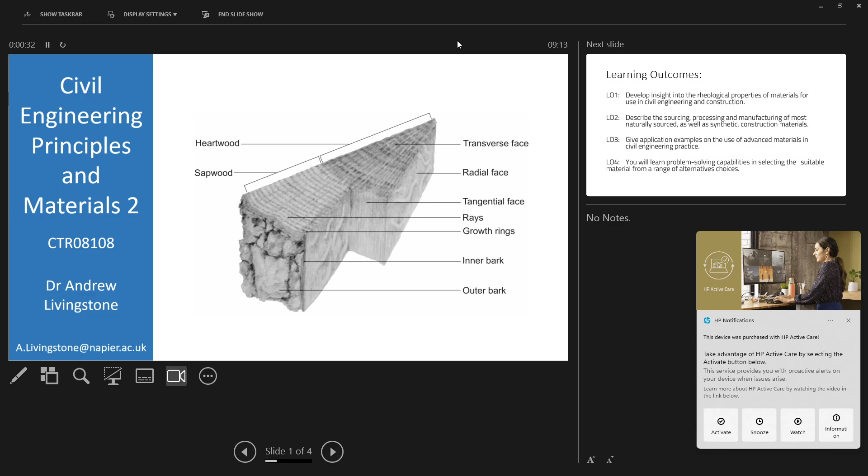Doesn't matter. Right, so name of the module, materials part 2. You probably can't see. Move this out of the way. And right, the learning outcomes, all this will be online for you. I'm not going to read word for word, it's a bit boring. However, this is what I want to talk about. So this is our program for the term. You're going to have to do some exercises, courseworks. So you've got, if I go forward one page first of all, I'll explain.

Hi Taylor. We've got formative assessments and we've got summative assessments. Your summative assessments are lined up like this. This is where the choice comes in. It used to be when I first took this module on, I would do this as one coursework, right? And people would genuinely fail it. I don't know why they could, but they actually would fail it. The reason being, they would put it off and put it off. We'd do all the lab test work, but they put it off to the last minute, then submit it. Then you've got 2 other modules that you're also doing, and then it would be just too much.

So a couple of years back, well, more than that now, I've separated this up into 3 bite-sized chunks. And what we decided was, if you do the first one, all 3 are pretty much exactly the same. I'll give you an example of the 3. As long as you hide your phones and don't record. I'll show you how some of you got 100% on all 3 of them. I'll show you how they look. Right. But if you do the first one, I'll give you written feedback on how to improve it before you submit the second one. Then you submit the second one, I give you more written feedback before you submit the third one. So you got a chance to improve that mark as you go.

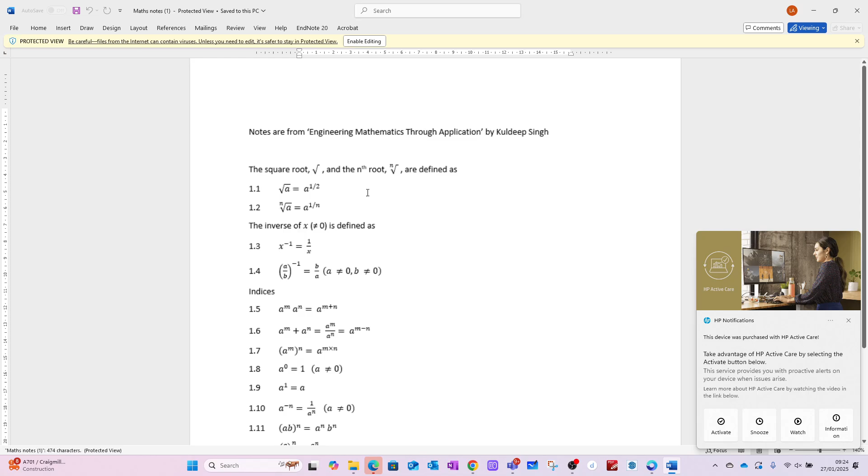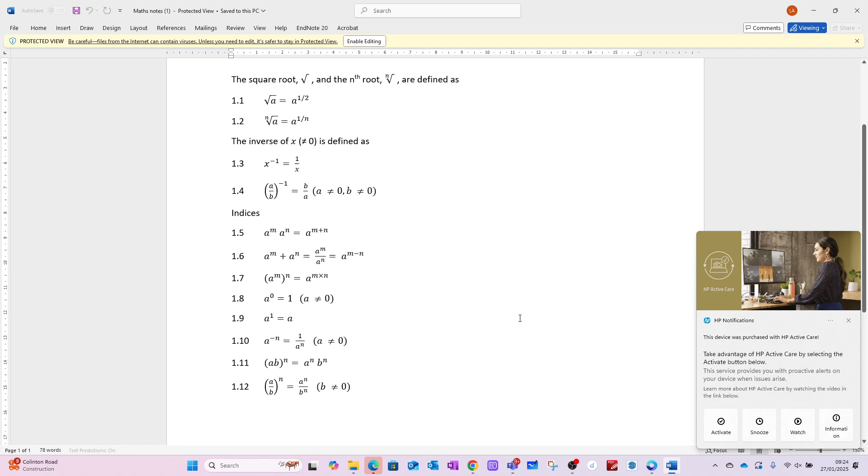There's an obligatory module guide. You read that through at your own leisure. I'll not go through it in here. There's this cheat sheet I was telling you about. It's just ways to manipulate or how to convert things. It's all about just changing a formula to get out what you want out of it. I don't think you need any more than that, to be honest. However, there are worked examples in this book, which I have given you. Let's have a look at that just now.

What I'd recommend you do is you download this book and save it somewhere, keep it. It's actually a handy thing to have. I will, however, put this book online as well, as long as you don't grass me up. I'm not too sure I'm allowed to do that, to be honest. But I'll load it up and I'll take it off before the end of term at some point. Okay? Of course.

These sorts of equations, though, for beam analysis, you'll need to remember the main ones. The main ones you'll want to remember off by heart will be simply supported with the UDL and simply supported with a point load in the middle. The ones after that, if you can remember the Macaulay method that you got taught last term, then you'll be fine.

Right. Two other documents I've put in here: BS EN 408 and BS EN 338. We're going to cover them later on. We won't touch on those today. Right. So what we'll do is we'll just go straight into today's class.

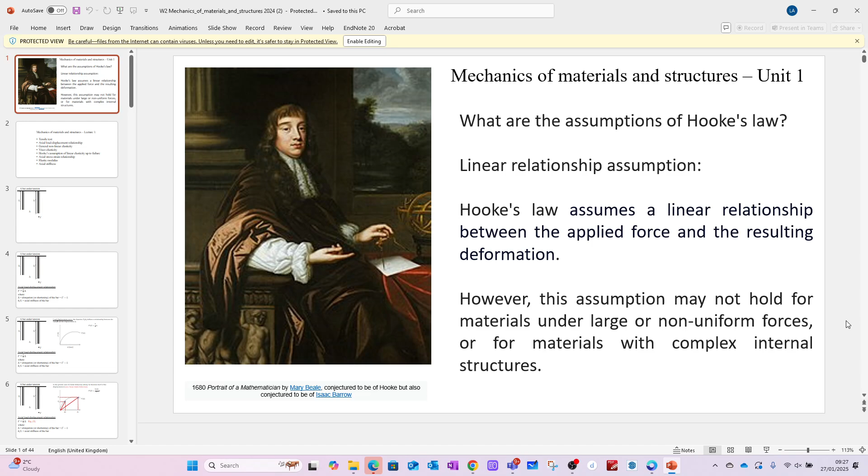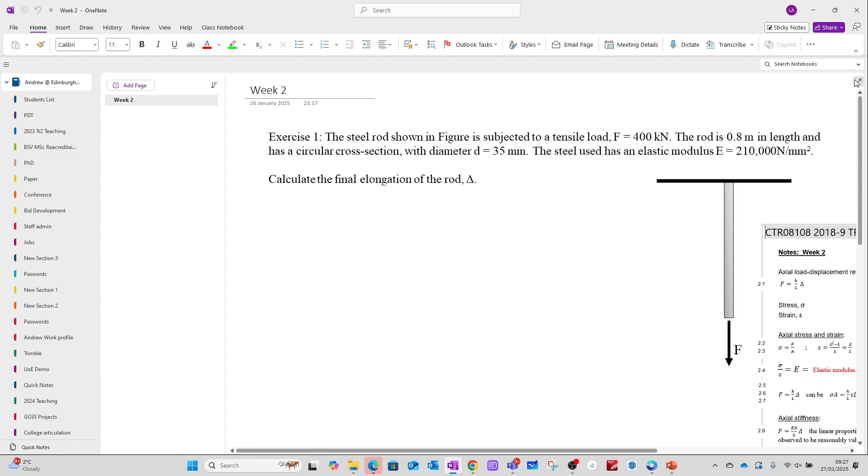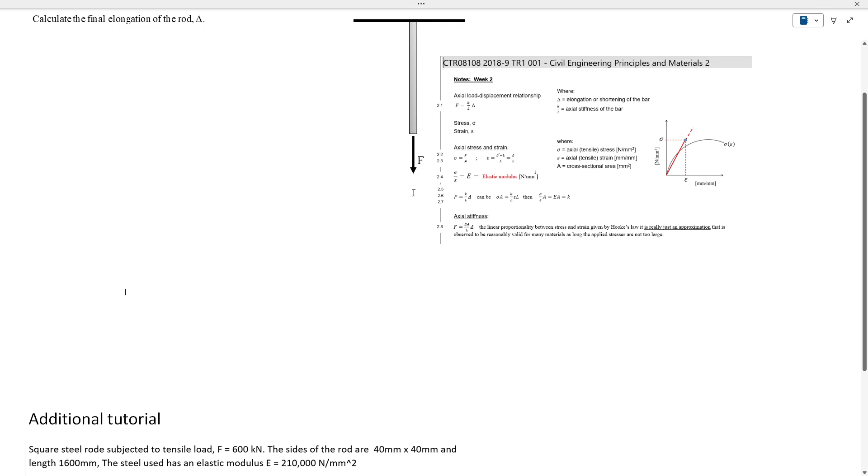Right, on that note, I'm just buying some time now for Terra to come back. I think that's her name.

This is my equivalent of the notes from today's lecture. Now you'll make your own version of this. So I went through this material and I've made my own notes from it, and that's what I would call my cheat sheet. Probably won't give you this in the class test. You'll have to memorise some of it. So I'm going to show you my tricks. I do things that help me. I'm heavily dyslexic. I find it difficult to remember things like this. So I do things that help me. Might not help you, but it might.

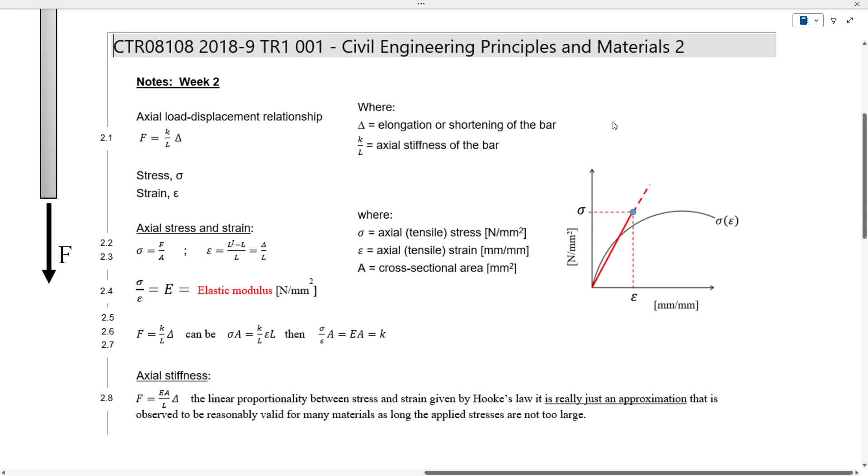Are we writing this down now? No, you're not. No, that'd be too boring. You want to write stuff down once you actually know what you're talking about. Right, I think we might just have to start, I'm afraid.

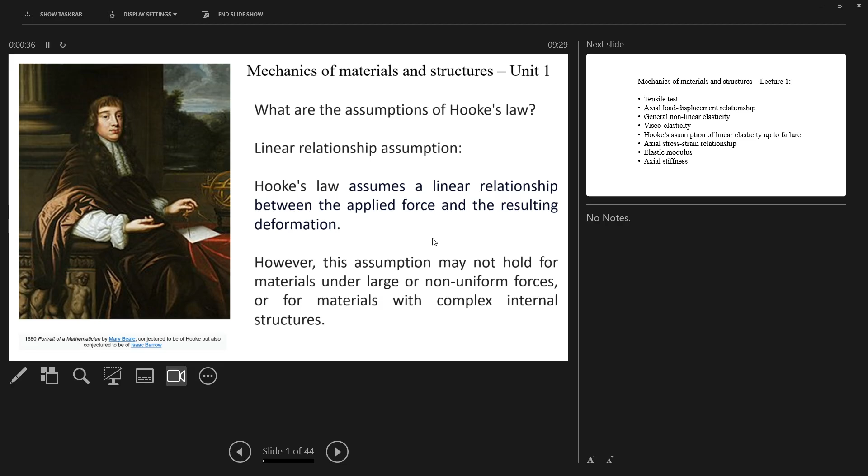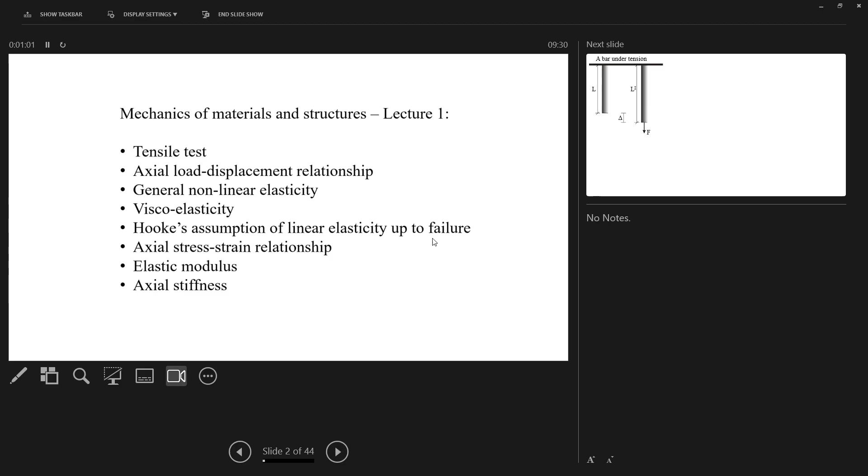We'll just crack on. Right, so this is the learning outcomes from today. We will talk about visco-elasticity later on, because that's possibly an interesting one, even though it is covered in one of the other modules. Right, so that's a bit more of a recap from what Juan taught you last year, yeah? You've seen this before.

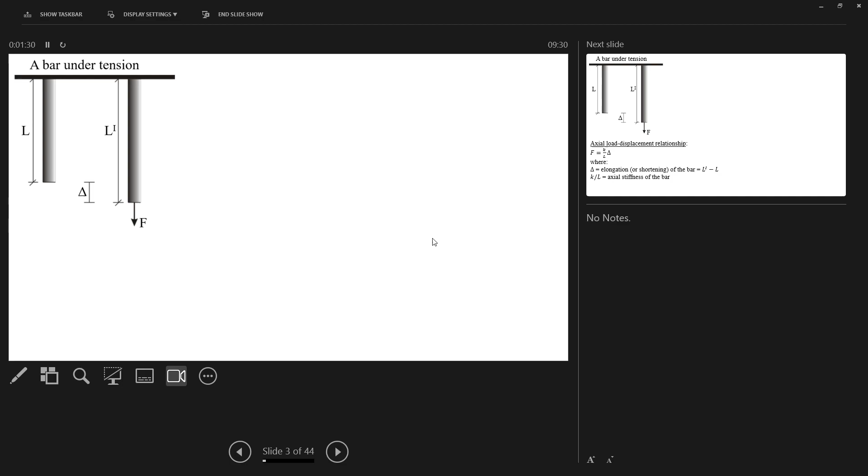So if I've got a rod and hang a weight off of it, it should elongate. I'm going to call that elongation delta. And so there's your first equation here: force equals K divided by L times delta, where delta is the elongation or the shortening of the bar. It could be a compression force or a tensile force. So you can write this down, and then K over L is the axial stiffness of the bar, how stiff that bar is. This is actually really quite important. I actually want to write a paper on this stiffness thing for a much more complex scenario at the moment.

Right. So if I'm going to apply a force onto that, and I've got my elongation along the bottom and my force up the side, I'm going to get a graph somewhat like that. Okay? Like a real live, like a real, what would we call it? To be fair, that's a bit more of an exaggeration, but it wouldn't be perfectly straight lines anywhere.

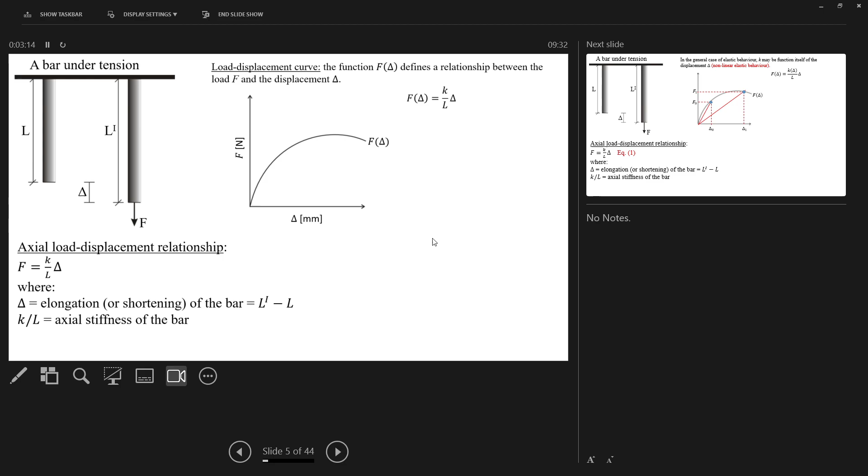However, we're going to make some assumptions. Now, I can show you real data another time, perhaps, where, in actual fact, this is a bit of an exaggeration. There would be areas that would be more straight. However, Hooke's law makes some assumptions, and they are just that. They're assumptions.

If I apply a load, so F0, up to here, and I then take the load off, I would expect my material to go back to its original shape. Okay? Well, first of all, if I find that.

However, on this graph, F1 and delta 1, looking at the shape of that graph, you'll not have covered this yet, but I would consider it very unlikely, if I take the load off, that it would go back to its original shape. Why would that be? Well, let's have a look at this first of all.

Force over delta, K is stiffness divided by L, whatever, right? From equation 1, we've got these here. You've got two lines. Let's have a look at what KL is then. I can shadow on that, yeah, I can. Right. For just now, assume that the load will go back to its original shape. But look at the angle of the line.

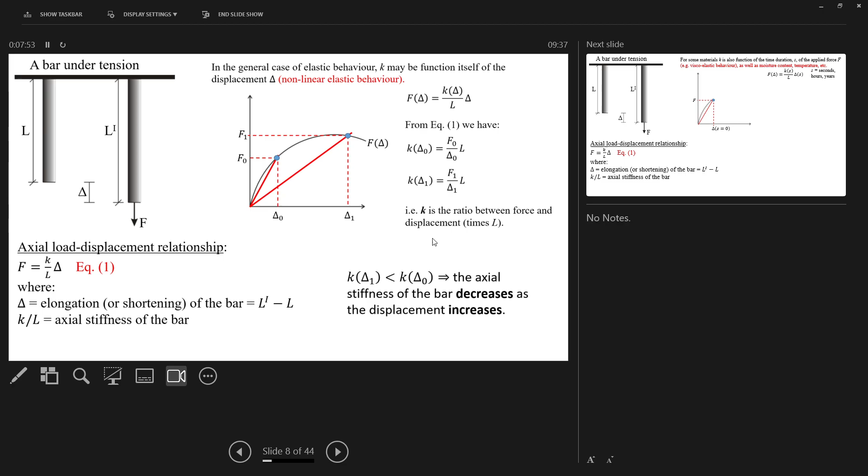So S is now a measure of time, where before, on the previous slide, we were talking about the magnitude of the force. Now we're not. We're keeping the force the same, but all we're now going to do is elongate it. Now it's got it in seconds, but it could be seconds, minutes, hours, days, weeks, years. Over a period of time, we'll have fatigue on that material as well. There'll be a displacement.

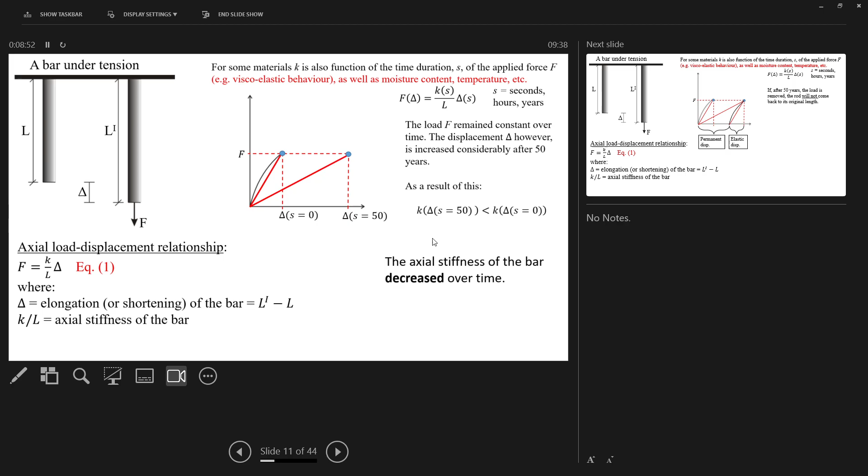So that's something that would be thought about for various structures, depending upon what it is we're trying to design. And we do indeed use that. We call that creep. Some materials we don't even bother about it, but other materials we actually do have to consider this factor. We call that creep. Or for concrete, we talk about fatigue. Metal as well. Right. Now we're going to get into the heart of Hooke's law. Hooke's law starts talking about this linear elastic and then non-linear plastic behavior.

What you'll find is if you then take the load off, it's never going to come back to its original shape. It won't do that. However, it will come back to a point. There will still be deformation from the original. And that will be permanent displacement.

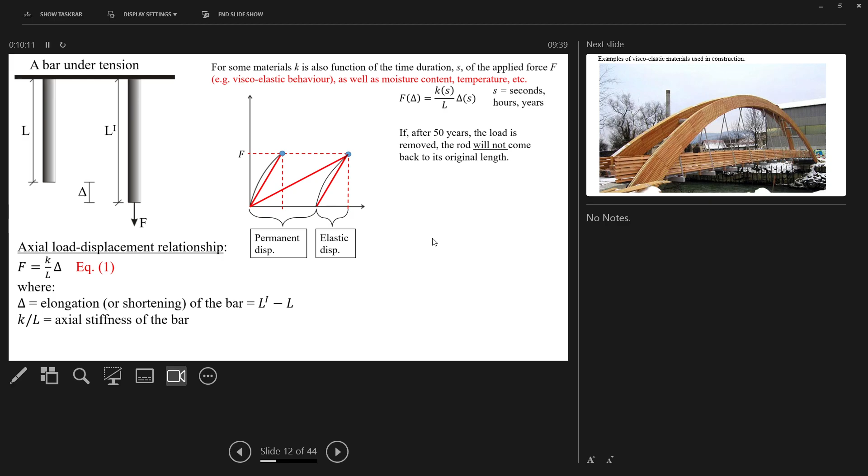For this part, for the load going back on again, and with the permanent displacement. That's the sort of thing we're kind of getting ahead of ourselves now a little bit. But again, on this sort of bridge here, we would definitely find that sort of scenario happening.

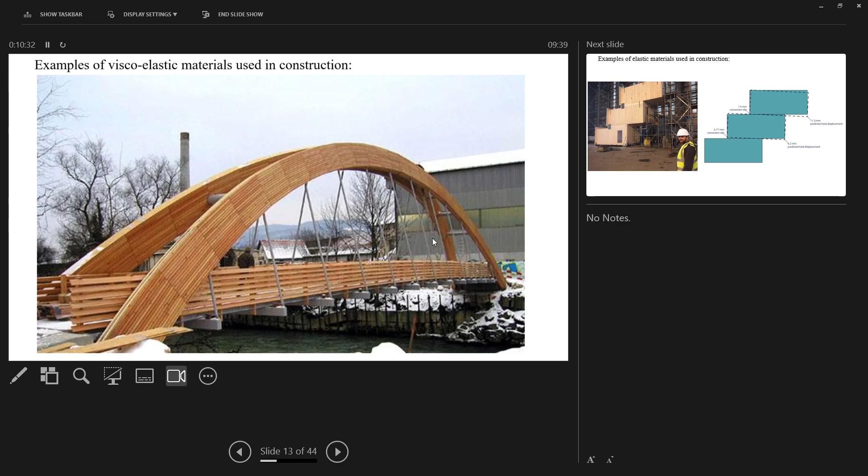You all remember in first year when we built those cardboard Dyson modules? Remember those Dyson module things? I had to account for that in this. Actually, there's a slide you've seen before. We had predicted total displacement.

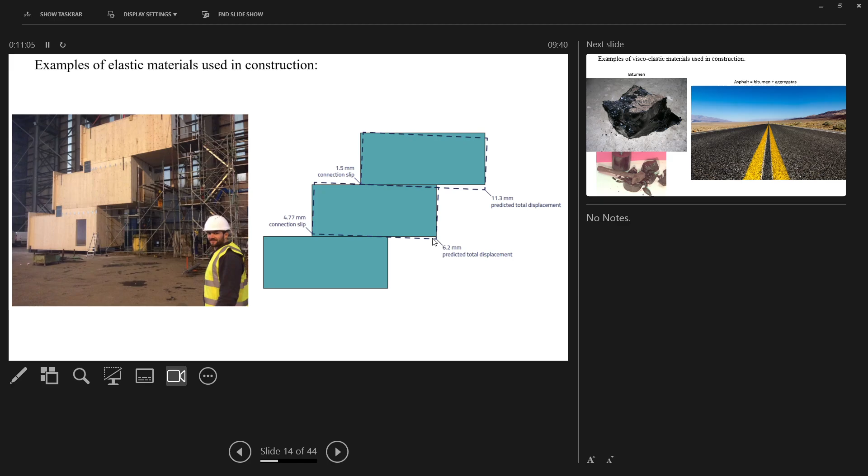I worked all this out with a bet of about 7 engineers. I worked out all the maths. They waited until I put my first bet in and they all went underneath me. I came last. We actually worked out who would be nearest it. So I worked it all out. I divided my answer by 2 and everybody then went underneath what I predicted. I lost a bar of chocolate. I was quite annoyed. Right.

Okay, I've left this in. Well, that's quite good. I was asked to take this out because you've been taught about this elsewhere. Has Juan been teaching you about viscosity in tarmac? No, okay then, we'll talk about it now for 2 minutes.

There's a lovely experiment where they took some bitumen and they put it in a glass and they've left it for, we'll find out in the next slide, from 1927, the experiment started. Bitumen is a liquid and it moves, but it moves incredibly slowly.

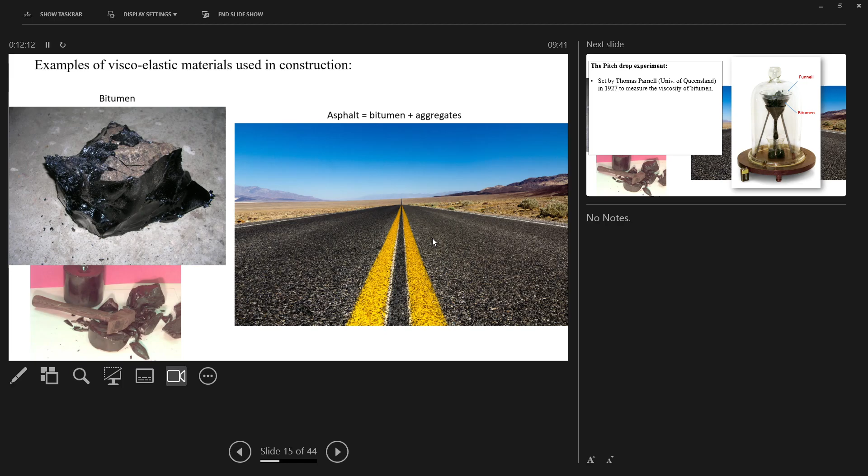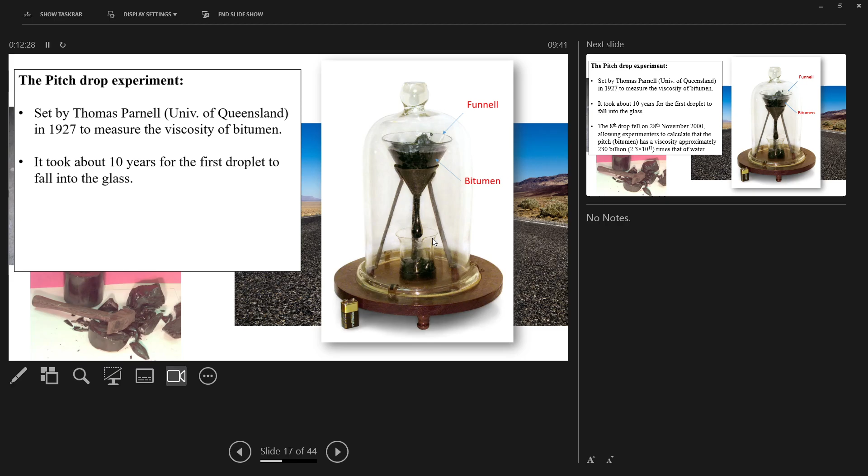There was a slide in here when I took this module over, which I had to remove, of big glass frontage. People up until quite recently used to believe that glass behaved also like bitumen. It was actually moving. I'll show my point first of all. There's the experiment here. I believe it's still running to this day, where the bitumen is sitting in the funnel like that from 1927, and there's a number of drops fallen, and I think it took 10 years for the first drop to fall into the glass, and yeah, so it's still going.

They used to claim that glass was the same, and nobody ever questioned it. And you were probably even taught this yourself at school, that glass is flowing. I was taught it at school. Absolute nonsense. Someone did some scientific research on it, i.e. they went round all the old buildings where the glass was thicker at one edge rather than the other, like 200-year-old buildings. And what they found was, it's nonsense.

When they used to make glass back in the day, they would blow a bubble of glass. They would then cut that off, fold it out, and make panels out of it. And in the old pubs, the bottom pane was that bit at the bottom of the bubble. It was a bit weird. They used that as a decorative panel and small panel for old pubs. Am I showing my age now, yeah?

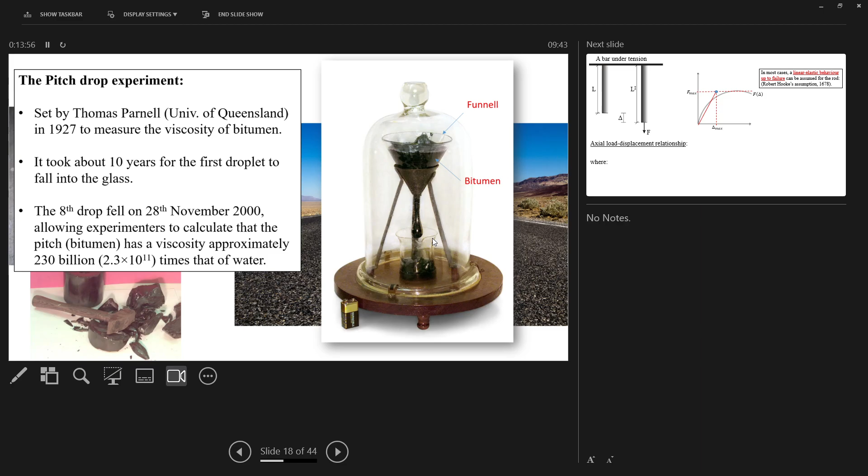There are some old buildings that have small panels in and every so often there's a panel with a little nodule in the middle. That would be from the blown glass, the bottom part of the bubble. But the rest of the panes, it would depend on however it was put in. So you'd find thicker glass at the top or the side, it wasn't all at the bottom. People actually thought that glass was behaving like water. It wasn't. Anyway, we'll move on. I'll get back into steel or other materials now.

So again, this is more of a recap of what you've done with Juan. We've done all this with Juan so far, yeah? This sort of thing. Good, right. Now let's have a look at this linear elastic relationship, i.e. Hooke's law. Because that graph is the same graph we had before, even though I do think that's a bit exaggerated. In the real graph, you will see a bit more linear behaviour. But for simplicity, we're showing it like this.

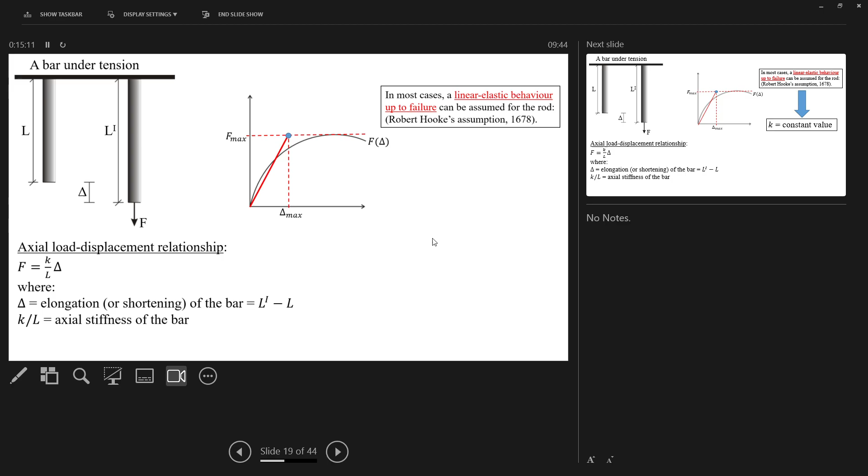Because Hooke's assumption, it's not a law, it's actually an assumption, is actually a fairly good assumption. And engineers, we all use it to this day. So the equation you had before, force equals K divided by L, which is essentially stiffness, that angle, times delta, the elongation. What we find is K is a constant value.

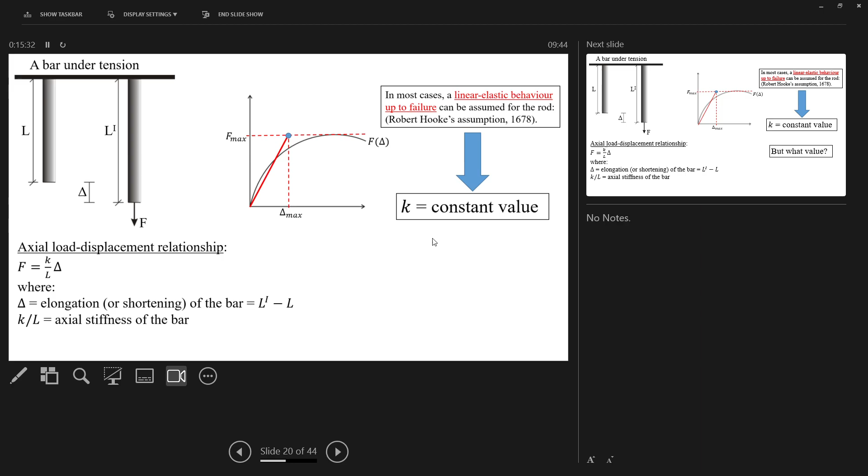I haven't even told you what K is yet. All I've told you is that K divided by L is stiffness. That's all I've told you so far. But we know that K from this will be a constant value. But what value? Right. Stress and strain. You've been taught this before at high school, I believe. Right. Stress and strain. What is stress?

Stress is a force over an area. So if I have that surface area over that table, the stress underneath is force over area. Strain. What's strain?

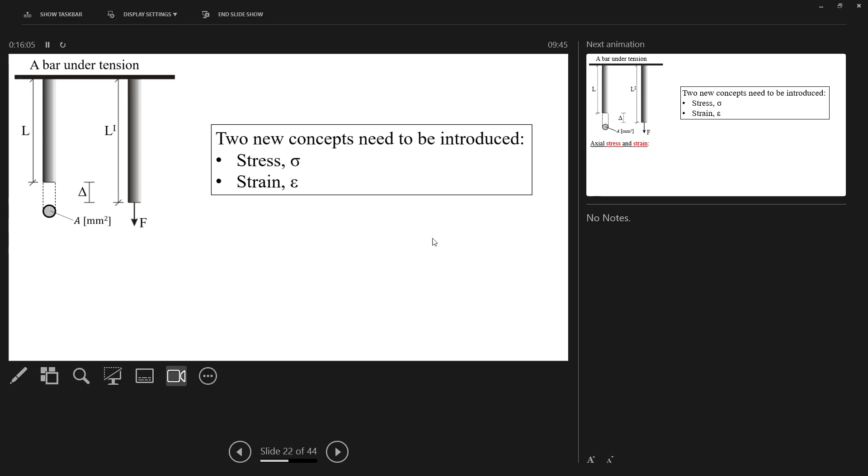Sorry? Kind of, yeah. It's this is a good thing then, right?

So for stress, force over an area, if we write this down in units, okay? So the axial, tensile, or compressive, yeah, that's fine. Right, I've been stupid. Right. Tensile or compressive can be newtons, force, divided by an area, a millimeter squared. So that unit is important to know. You want to know what units things are in.

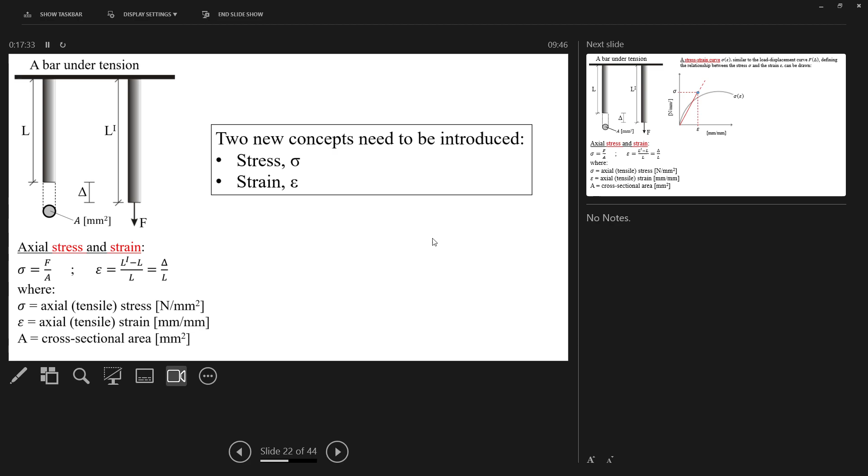The strain is essentially millimeters divided by millimeters. Let's have a look. We've got the elongation, that distance there, divided by the original L. So it's just millimeters divided by millimeters. Don't be naive and think, oh, that's just unitless and I'll not remember to think about the unit. In this module, I'm going to help you to write down what those units happen to be if it is a ratio. If it's a ratio that you know what the units are. There will be some ratios that we use that you don't know what the units are, and that's fine. But when you do know what the units are, do yourself a favour, jot them down on the paper. Right.

So the stress strain curve has a relationship. And here, so there's your next equation there. E, or the modulus of elasticity, equals stress over strain. And that's quite an important equation to remember. We've got the force displacement relationship, seen that before. Now it can be rewritten in terms of stress and strain. Force equals stress times area, and then delta, or the elongation or shortening, can be rewritten as strain multiplied by the original length.

Okay, does that make sense? If it doesn't make sense, go home tonight, take some paper and sit and just work through it until the penny drops. There will be quite a lot of equation manipulations. And the best thing to do, honestly, cheap white paper, steal some from the photocopier if you need to, and just sit and just go through it. Right.

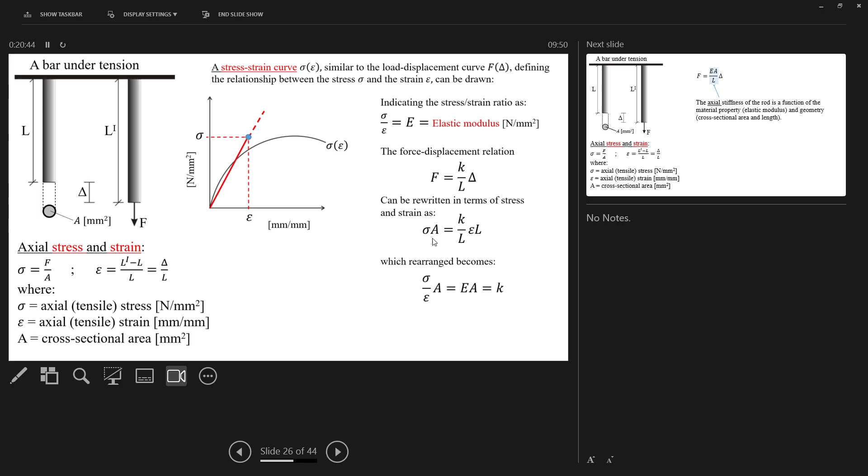Oh, sorry, you write it down? Sorry, I'll keep it up till you write it down. I think what I'll do, I'll actually just put the recording online for everybody. There's maybe a bit much in this. Right, we're all good to go?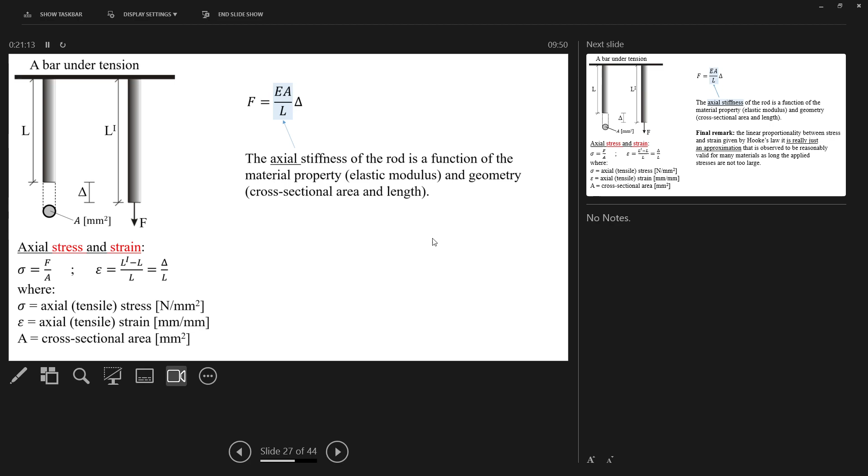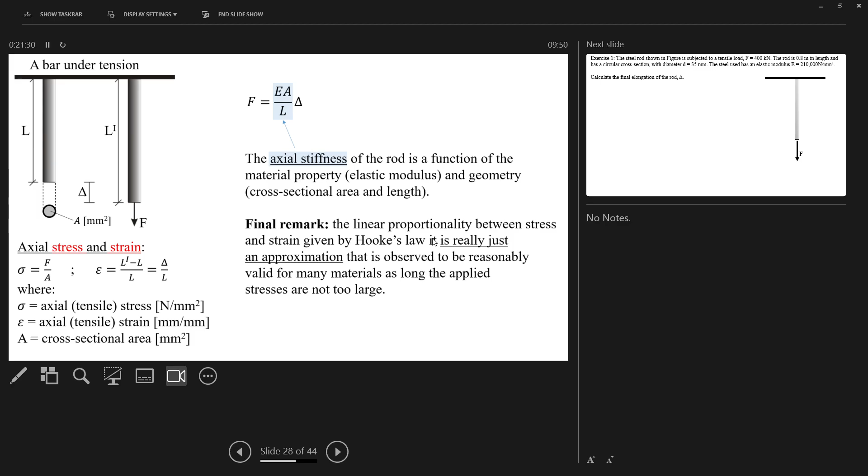Right. Okay then, the axial stiffness. Remember this was what used to be K up there. Same equation, just we've got EA up there now. Of the rod as a function of material. So this is a function of the material properties, the elastic modulus, and the geometry, the cross-sectional area. Final remark. Yeah, so I've already said this multiple times, it's just an approximation. However, we use it to this day, all engineers use these assumptions.

Right, exercise 1. So with what you've already got, what I'm going to do, make some space for myself. What to do is, this is the exercise. Can we calculate the elongation of the rod, delta, with these parameters? You already have the equations that you need. So we've got force as 400 kilonewtons. We've got the rod as 800 millimeters. There's a wee clue there. Has a circular cross section with a diameter of 35 mil.

And it has a modulus of elasticity. We tend to write the MOE down in different ways. I keep calling it MOE. It's written as E, and there's other names for it as well, but it's just modulus of elasticity. We have all the data that we need. We should be able to calculate that. Give it a wee shot, and I'll get myself set up.

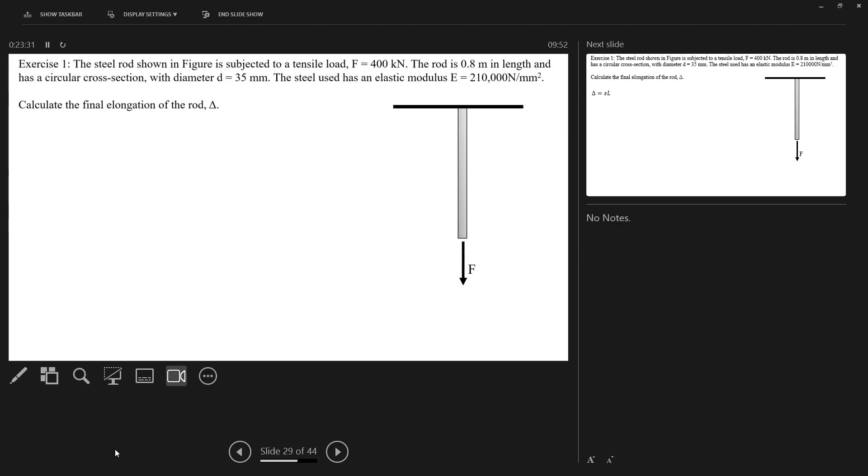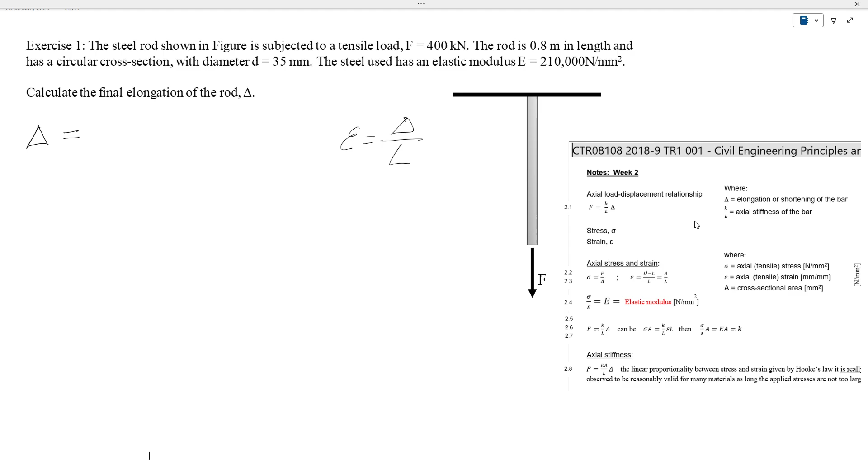There's a valid point. I'm going to rewrite that equation to suit me. Remember, this is what I do. I'm dyslexic. It works for me. It might not work for you. Maybe you don't need this. I tend to do it all the time. What is the equation in 2.3? Yeah. So the equation we've got is strain equals delta over L. I'm going to rewrite that. Anyone seen anyone do this sort of thing before? Yeah. So I'm going to use that. I want this one. I've got these two here. Make sense? Right.

Now, I have L. Actually, what I would normally do is write out, I saw some of you doing it as well, all the variables that you actually know. So we know force, we know length, and this is where one person might have tripped up originally, was the units. So when writing it out, I'm going to go back to the start. I can take my time. I've got lots of time on this. So force equals, pardon me, force equals 400 kilonewtons.

Length equals, at this point, I'm as well putting everything in the correct units rather than waiting to the end. Because for you it was really easy, you knew what the problem was, and you could probably have fixed that without even recalculating it. However, when the equations get a bit more interesting, you definitely won't. It'll be more of a mind mess up. So get in the habit of doing this. Write all the variables out again. L is 800 mil.

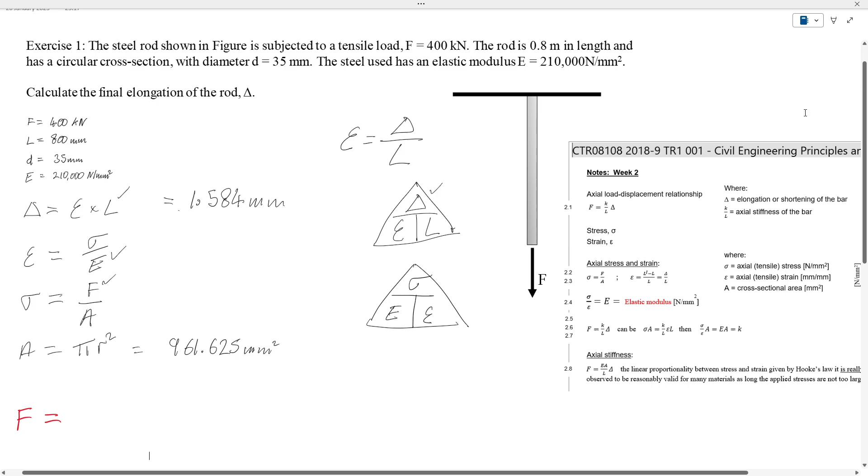They just looked at the bottom here and went, oh, that's handy. Just look at that bottom one. So they just wrote it out. They wrote force equals, sorry, you can't see that. Why can't you see that? What's happened? There we are. Right. Force equals E-A over L times delta.

Without any hassle at all, we just rearranged it and just got delta equals F-L over E-A. Right. Obviously, we can calculate A, and you've got everything else. You've got force, you've got length, and you've got E. You've now got A. Then you get the answer there, and it gives you the exact same answer. Make sense? Much faster than how we done it the first time. Much faster.

Right. These are obviously switched on. Most folk don't see that straight away when I do this. However, what I'm going to say is in this module and in real life, to be honest, real life problem solving, this is what engineers are. That's what we are. There's always another way to look at it and think, can I calculate it a different way? Are there equations or is there another toolkit? Can I use calculus? Can I use complex numbers? There's another way to calculate what I want.

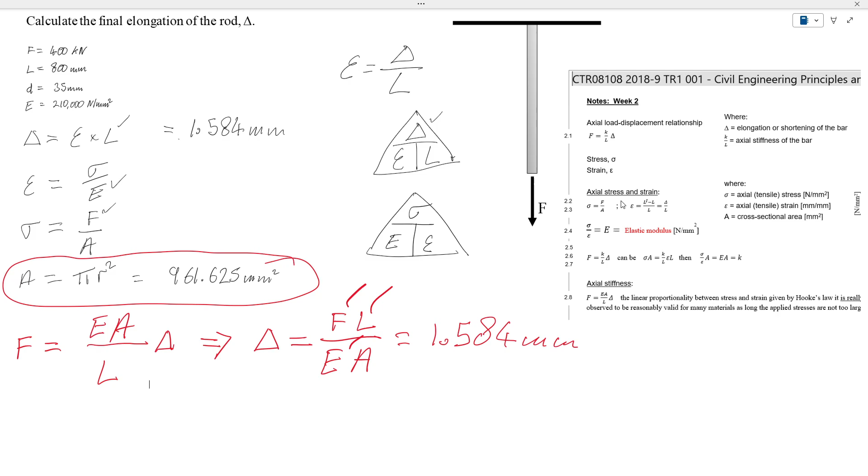Whilst you're doing that, I'm going to talk some nonsense in the meantime. I quite like this module. Quite a good module. It's quite a lot of background theory that you're going to need for the rest of your engineering career. I wanted to change it. In the lab experiments that we're doing, now I've not had time to change it, so it'll be as it normally is. We'll be using the lab downstairs with really expensive equipment. I want to do it with classroom equipment, cheap, easy to do lab experiments, which I thought would be way more fun and a lot more hands-on. However, if I get a chance to actually do that, I think we'll actually do it anyway.

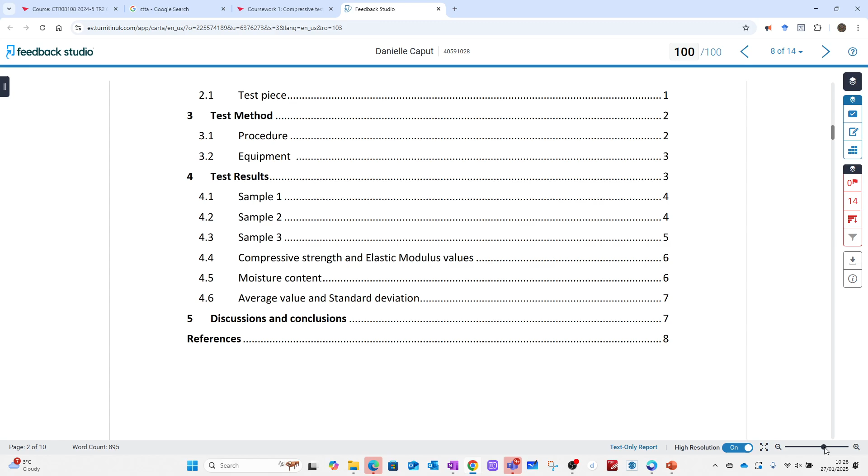So this isn't me telling you what your courseworks are just now. We'll do that in another class. Just that we've got a bit of extra time here. I want to just show you how similar or how exactly the same all 3 are. Just the mathematics is slightly different, right? Take blank off. Come on. Oh, it's on, right? Perfect, right. Let's get past the person's name. So, okay, that's fine. We all know who it is now.

So they've got a nice front cover, the logo at the top, make it look nice and plain. Table of contents, small introduction. Please try and be at everything in this module. The more things you miss, the more difficult it will be for you. So be at things, take photographs, take lots of photographs when you're in the labs. I'm not asking for the world here. Just a fairly simple report. There's the first test that was done.

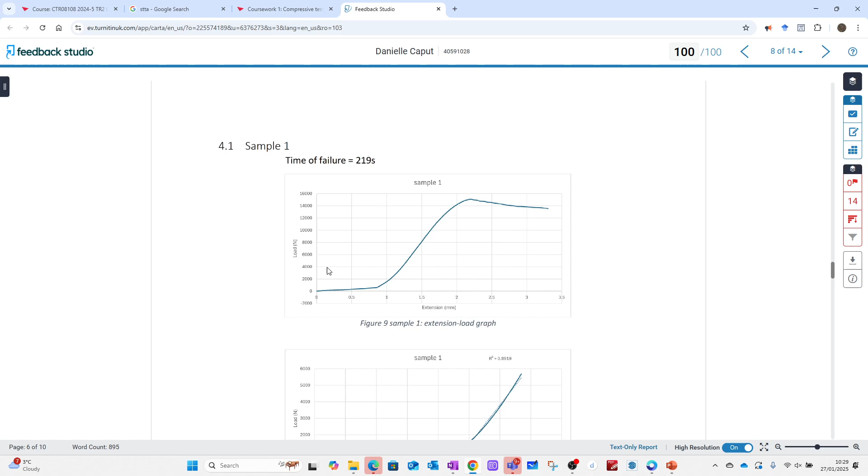Was it yourself that was saying that would be a shear failure? The graph that you get from this is quite interesting. There's the graph there for this one. It gets up to what's called an F max, then it stops, and then it'll never take a higher load. It won't take any more load than that once it's taken its maximum load, and it's not falling to bits, but it'll never take as big a load as it did before it broke. Yeah, the resistance isn't strong. So that's failed at this point here.

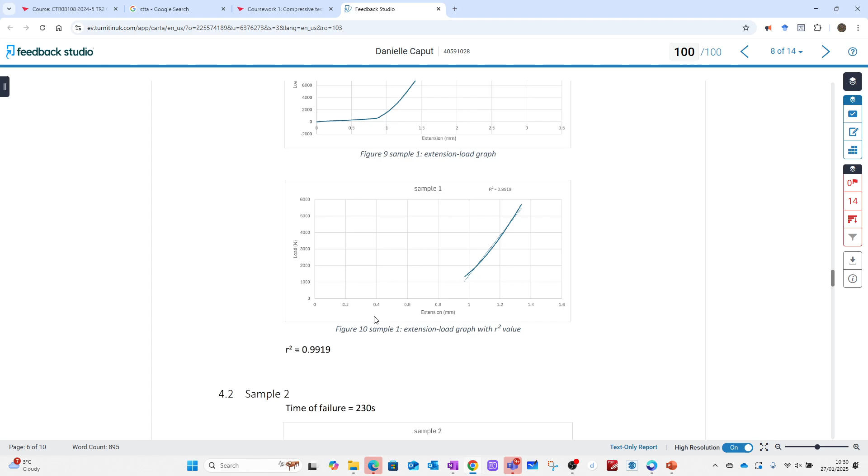We then take the linear part. Now you'll get taught more about this in the coming weeks. You've only had an intro to this just now, but we then take this area here, actually about that area, to be honest, and blow it up. And this is Hooke's law or Hooke's assumption we said. It's not perfect. You can see the data is not perfect to that dotted straight line. And we get what's called the goodness of fit, or R squared value. Just done all of that. Second test, third test.

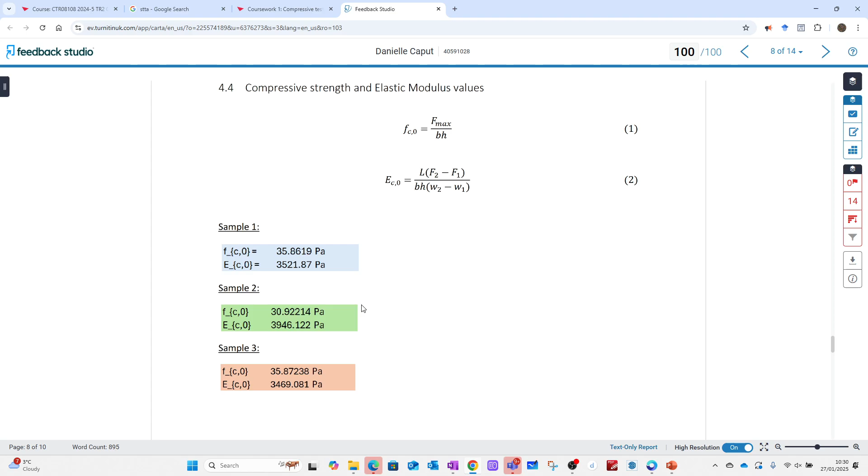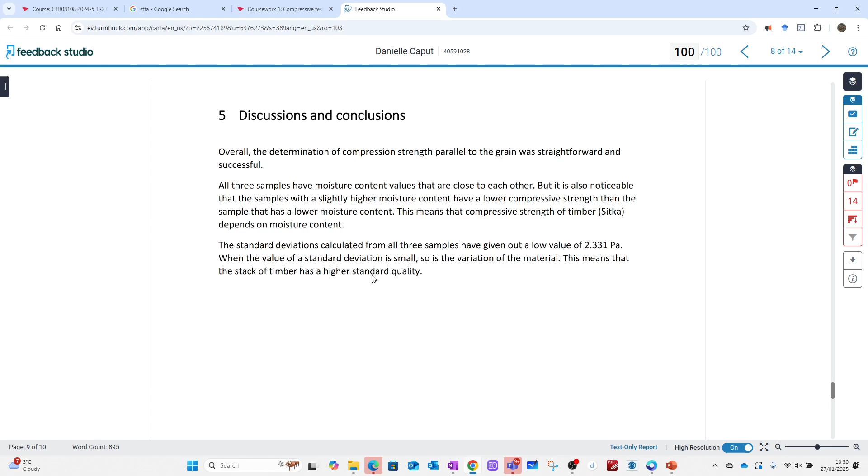And this person obviously came to all of my tutorials, and I'll show you how to set everything up, show you how to make graphs, show you how to take things in and out, and also how to draw within that graph as well. So she's copied my format exactly, put in the equations. It's not difficult. And that there earned that person 100%. So you see what I'm saying? I'm not asking you to spend 5 nights on it. It's a 1-night job. Okay? Fairly straightforward. However, this test, the first one we do, parallel with the grain, is the easiest one of the lot. Right. I'll not explain why just now. I'll show you the second one.

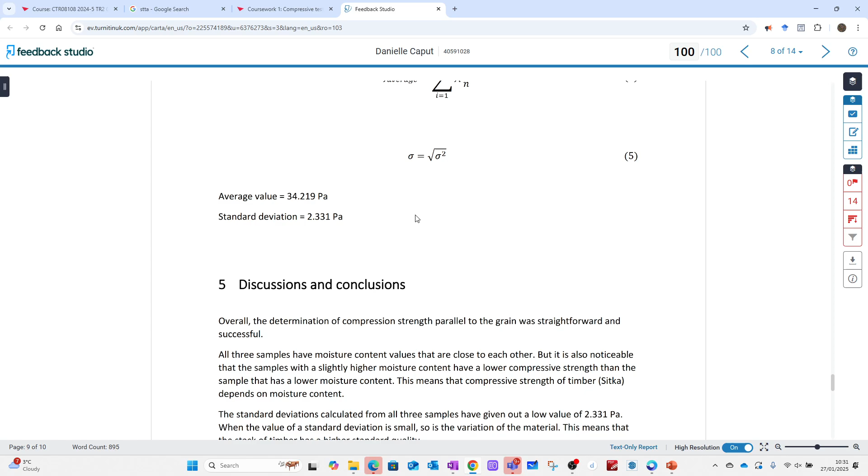Sorry, blank. Yeah, I got permission from that one person, but I haven't asked the whole class, so I can't show you. Now, obviously, your data will be different from this student. Oh.

So it's quite obvious to see that I do believe in 100%. It is quite easy to get 100% in this module for the coursework part. Okay. Now, if you remember the last one that this student put in, now how we mark it, you'll find most lecturers will use this sort of system. They'll tell you up front the categories of how things are marked. They'll tell you you got a percentage for presentation, readability, technical content, figures and tables, and conclusions. They'll give you categories and the weighting for each category, and they'll mark it literally on a sliding scale. It's a quick way of doing things.

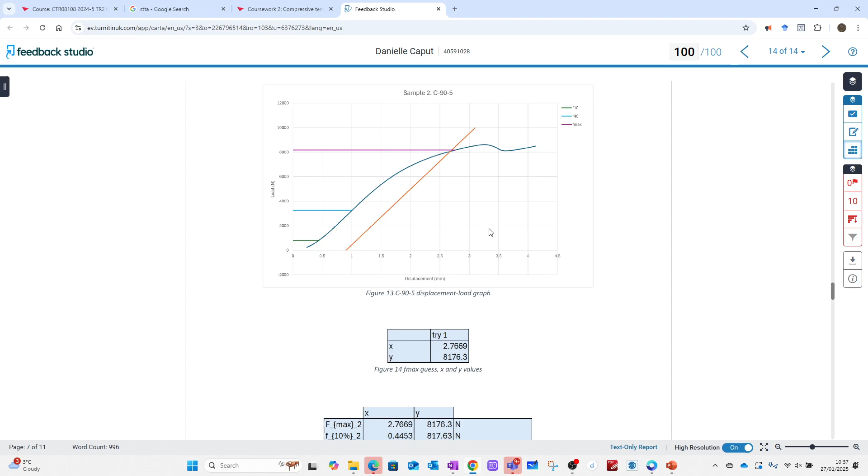I bet it goes on like this. And the angle of it will be tiny, absolutely silly. And it's already failed, right? The timber's changed size dramatically, absolutely dramatic. But it's already failed. And when you're doing testing like this, it's very difficult to identify where the F max is. And that's what I'm going to show you how to calculate. There's a correct way of doing it, a procedural way of doing it. And we'll talk about that. But you see the report, pretty much the same format as the previous one.

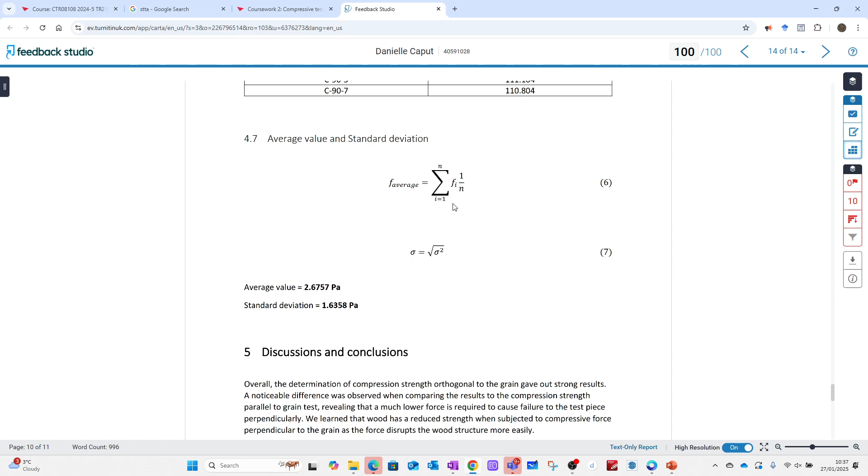Really, and again, they put in the equations for things, 100%. So if you've done the first one and you get a really good mark, or I tell you, look, go and do this a bit better, go and show this on the graph, then in your second one you implement those changes, as long as you understand the mathematics, as long as you are able to get the graphs drawn, which is easier said than done. Where's the graphs?

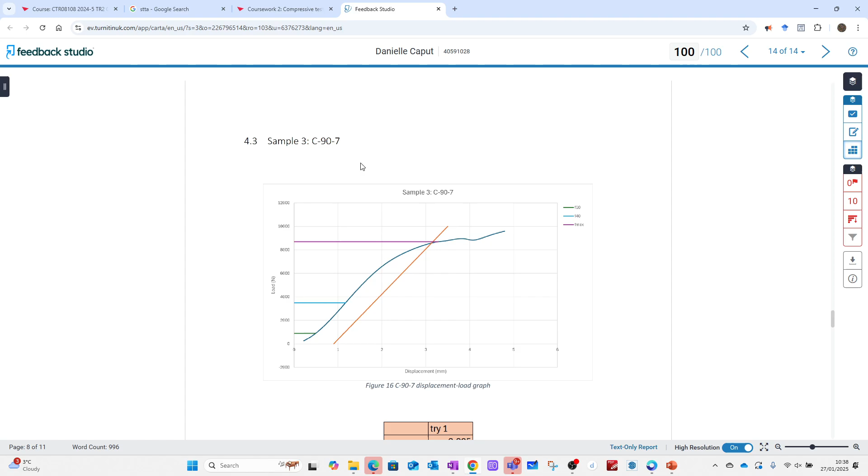Right. And it's not just a case of drawing them, also how did you get to the F max? Like, how did you eventually calculate the final F max? There's an iterative process. You have to do it about 4 or 5 times before you actually get it. Right? So again, 100%, you see the mark up there. Nice and easy. Not difficult.

The third test is actually a 4-point bending test. You've done a 3-point bending test with a concrete. Is it 3 or 4? It must be 3. I believe it was 3. Yeah, it wouldn't be 4. It's too small a beam, it's only that size. Is that right? Yeah, it's that size. But for everything else, we want to do a 4-point bending test.

However, when we do a 4-point bending test like that, again, it's back to that first graph. You just draw the graph. You find the F max by going equals max, open brackets, range, close brackets, and you find the F max. Stupidly easy. Right.

However, the conclusions and write-up on it are also worth it. It's not a case of just doing spreadsheets and job done. Also the conclusions and you understanding what it is you've done and what you've found. You actually see there, the marks are quite good. The marks genuinely are quite good for that class. Right.

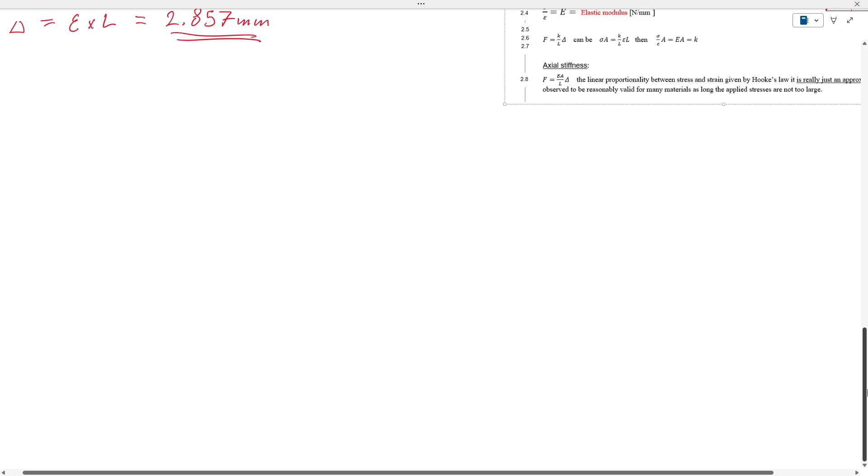Is the test in person, by the way? Yeah, of course it is. Just checking. On the module descriptor online, it's in person. Sorry, okay. I thought you'd have known that. Sorry for my tone of voice there.

Right, so there's two scenarios you've got. In a book like this, or I would just go and buy this book to be honest, but I'm going to put it online for you as well. You've got things like deflection calculated. You're unlikely to remember how to do that, but the moment calculations, please remember your moment calculations. They're the things you're going to need. You don't need to remember all of them, there's way too many.

And I'll be honest, when I'm doing a project, which I'm doing a few at the moment, quite often I do double check my memory, if that makes sense. I'm not the best at it. But if you're able to memorise certain things, these are things you're going to want to know. Because in later years, they'll expect you to know this stuff. So for a UDL, you had this before, haven't you?

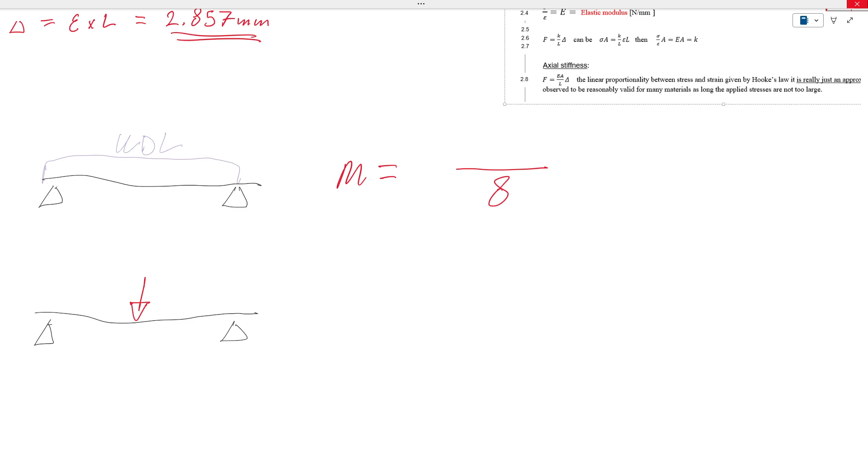Yeah, what's the equation? So moment equals, we know it's divided by 8, right? So what's on top of it? It's obviously load times the length. Yeah. So what messes people up sometimes is you've seen that written in slightly different ways.

How it's written in my book here, which I think is absolutely bonkers, they use capital W to mean the total load, right? And they use small w to mean the UDL, or let me just rewrite it for you.

UDL times L squared, or you could even rewrite that if you wanted. Okay? Or just remember that it's a total load times L divided by 8. That's the moment for a UDL. Point load in the middle, bit easier. Or is it? Anyone remember that?

No. Okay, what we'll do for next week. That's front page. But you know how to do the Macaulay method though, don't you? You've been taught it. That's right. Yeah. They're the sort of things you'll just want to have the ability to be able to do, right? And believe it or not, I know it uses calculus, but it only uses like 2 rules in calculus. It uses like the entry level stuff. It's really not hard. So try and have that at the back of your mind.

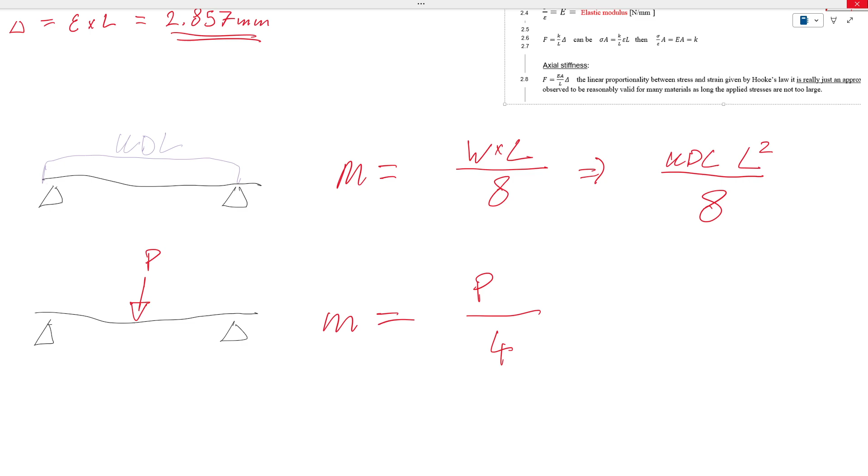Right. Also, whilst we're here, what would the reactions be for that simply supported beam? That would be just half the load. The load divided by 2, wouldn't it? So reaction A, reaction B will just be W divided by 2. Yeah. Right. So the moment for this is actually, well, it's divided by 4, not 8. And P is the point load. And it's just simply L. If you can remember those two, that'll make your life a lot easier.

This is what a master's class kind of had to get a wee bit of help with just before the exam. And that's shocking. Don't be that person. Right. I'll find this book and I'll put it online, but don't go telling them yet. I'll double check if we're allowed to hand that out first before I get in trouble.